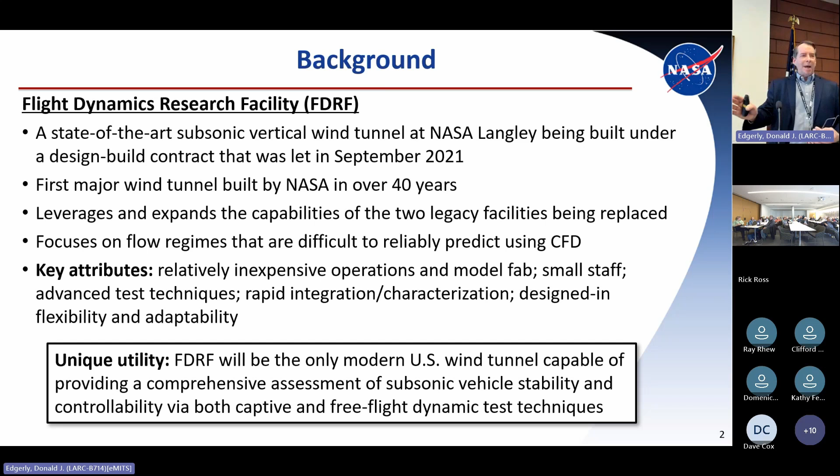So, all right, moving right along. So these are, and I'll try to use my little laser pointer here.

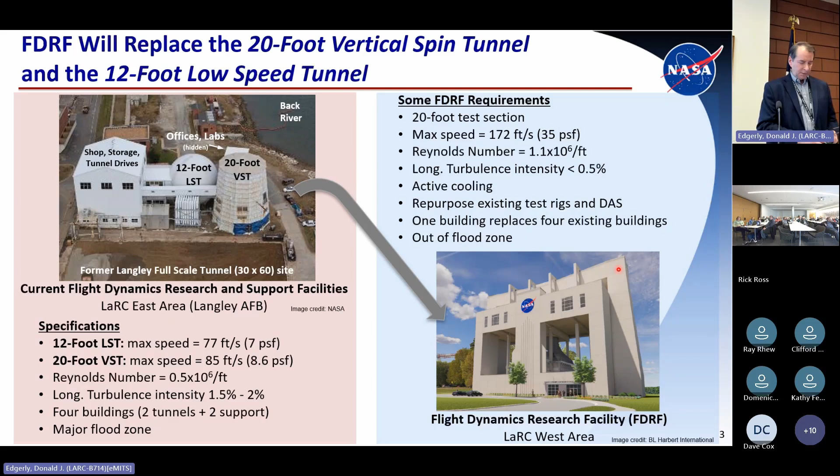This is before anybody ever talked about sea level rise, okay? So I'm assuming that was at high tide, but still, it's lapping at the concrete. I mean, they built it up a few feet, but after Isabel, I'll never forget having to go down to the bottom of the spin tunnel with a broom and sweep the crabs out. It smelled really bad down there. Some of them are still kicking, some of them weren't.

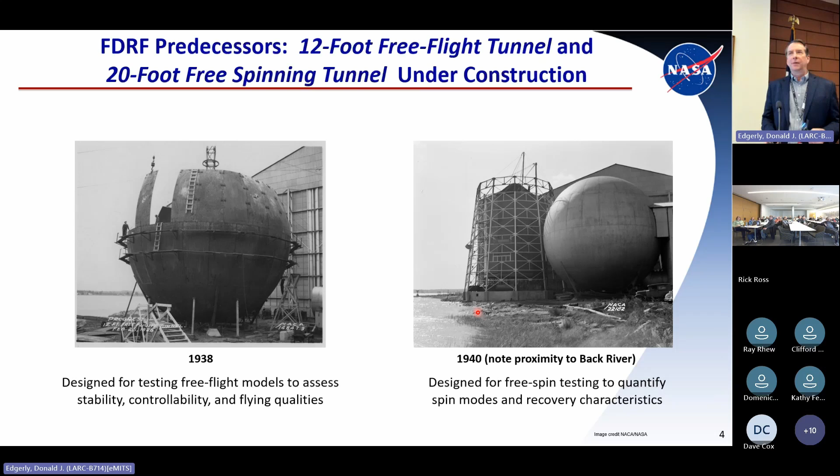But on the space side of the house, we've always, especially in the spin tunnel, supported the space program, all the way back prior to Project Mercury, doing things like landers, entry vehicles primarily, looking at dynamic stability. We did Mercury, Gemini, Apollo. We've now done Orion, and commercial crew, both Blue Origin and SpaceX.

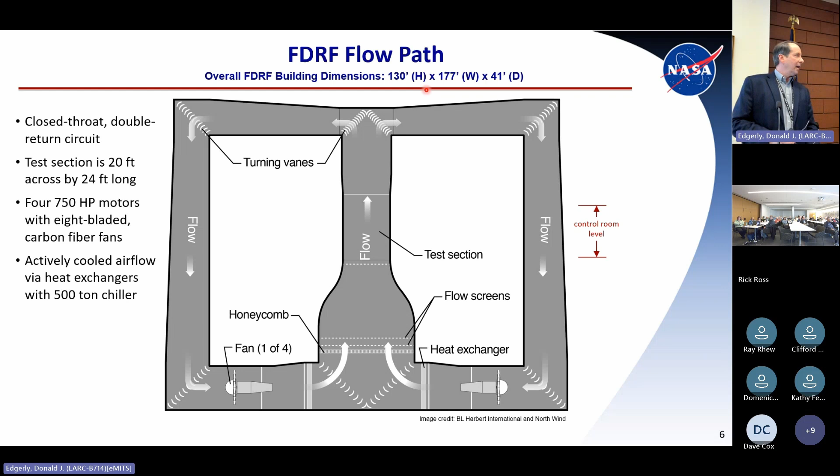And we'll have examples of people and models under test in the facilities. Our digital graphics guy, Lee Pollard, is working with me on that, and some others as well, to come up with the right photos.

It's going to curve around until it ends up at a big touch screen monitor showing what's going on today, going through all the decades until the tunnel comes online. Here's what's going on right now, and here's what's going to go on in the future, and that'll be changeable.

We also have a beautiful display case, floor to ceiling. It's about 18 feet long, floor to ceiling, and it's going to have a lot of the models and other test articles and artifacts going back to the 30s.

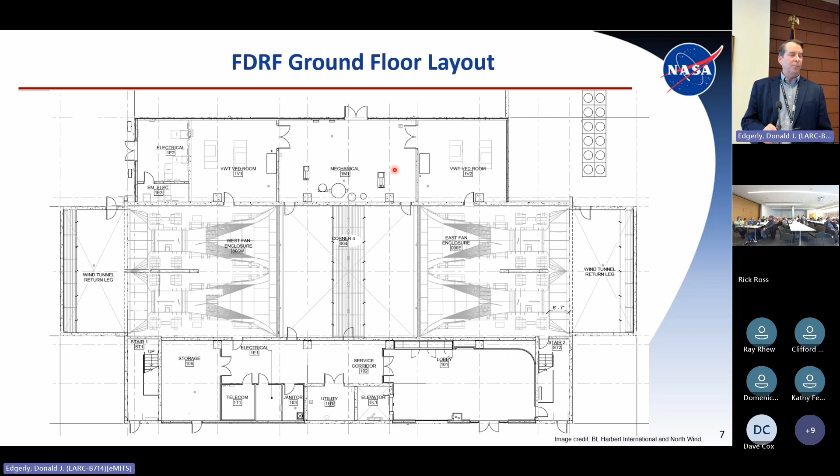Even though the tunnels themselves are very old and in need of a lot of maintenance, the test rigs, the data systems, and all that kind of instrumentation has been kept up to date. So we don't need to reinvent all that stuff, we're going to bring that over with us. That's phase 2 of this project, which we're getting pretty close to getting to.

That allows different types of dynamic motions to be made, and it also can handle much heavier test articles than the rotary balance. So between the two, we have a real spectrum of capability that we're bringing in.

The beauty also of the way we're doing this, unlike in the current facilities where the test rigs are either fixed in place or at best can push up against the side of the test section and kind of nest up against the wall, but they still hang out in the breeze — these are fully injectable and retractable.

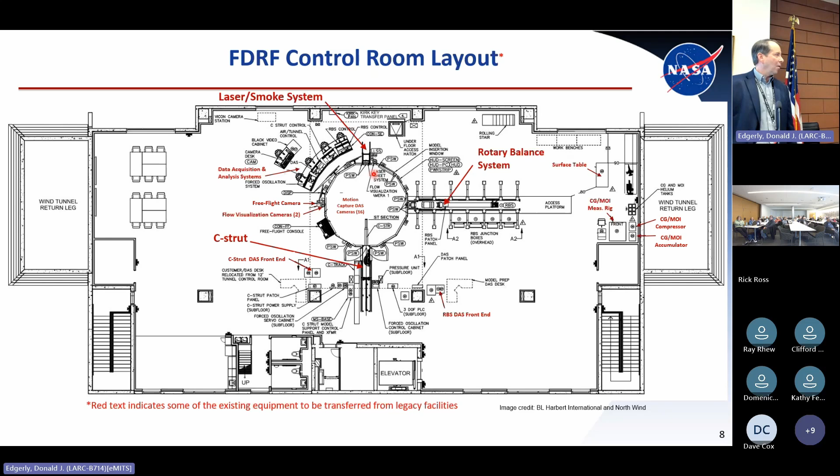It's actually pretty ingenious. So we need something like that in the new facility, but there've been all kinds of exotic proposals, like flying a UAS down there and grabbing it. But we'll probably end up with the grabber. Yeah, it's my guess too.

I'd just like to show this, and I haven't been good about using my laser pointer online, sorry folks. As I pointed out, this test section diameter is 20 feet, and by the way, it's 12-sided, it's not really a circle, but we still call it diameter. That's both the FDRF and the spin tunnel have that same diameter. This outer circle is the outer wall of the control room of the spin tunnel.

I just like to point out the difference in land area we're going to have for folks to work in. It's pretty dramatic. But like anytime you move into a bigger house, you think you have all the room in the world until you fill the whole thing up, and you need a bigger one. So I fully expect that to happen. That was actually kind of just a happy coincidence with the design too, because we didn't have a set requirement for how much space we needed.

We had a long list of stuff that had to come over from the existing tunnels, and we needed to be able to perform certain activities. But once they figured out the building structure necessary to support and access that, based on the original aero line drawing, it made sense. There are 5 central shafts: 2 return air towers, 2 stair towers, and a center shaft with the elevator and utility chase. It made economic sense structurally to span all the way across those, and that became essentially the entire second floor of the facility.

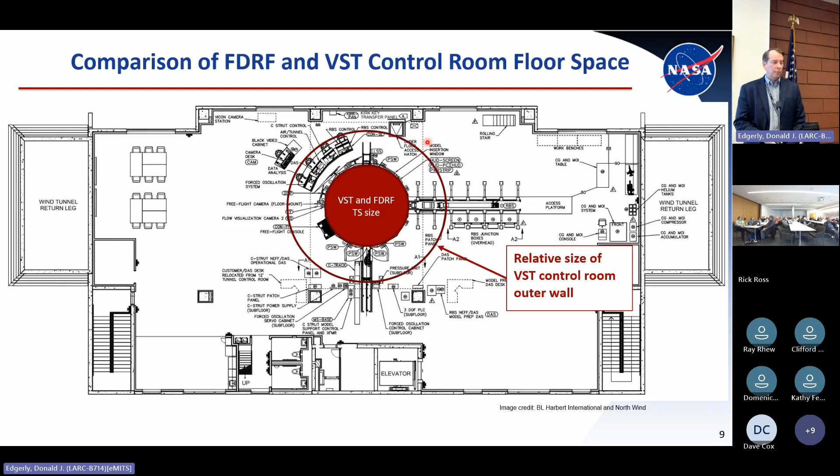Some of the test techniques, like free spin, require using the grabber to retrieve a model. This is an example: an F-18E model from 30 years ago being tested with a spin chute on the back. When the test is over, it falls to the bottom and has to be retrieved. For a test like that, I counted up something in excess of 800 separate launches of the model into the tunnel and retrievals, because you have to test such a large matrix of conditions. It's a nonlinear problem, so it's hard to extrapolate and say if it's good here, it's good there. A lot of that goes on in that type of testing.

This is what's called steady coning, that's the rotary balance. It's a captive test, just like in a typical wind tunnel, except now it can rotate about the velocity vector, simulating a spinning motion like an aircraft spin. You can measure forces and moments with an internal 6-component balance. You can take that data and do analysis to predict spin modes, or put it in a simulation database and use it as part of your 6 degree of freedom simulation, just like static data is used.

That rig also has what's called a forced oscillation motor on it. We can have the rig stationary and do the typical sinusoidal forced oscillation to get the dynamic derivatives, the damping coefficients. But in this case, because it's on the rotary balance, we can rotate it and oscillate it at the same time, which gives you some really dizzying type motion. It's a unique case where you need that kind of combined motion.

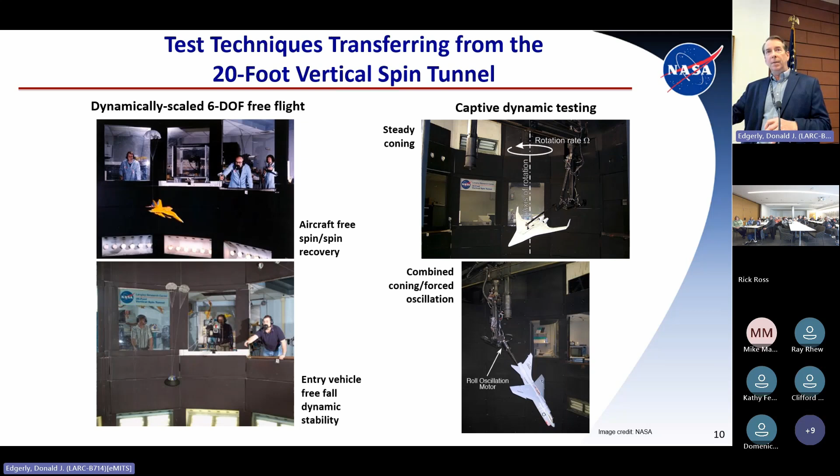Dave always likes to point out that F-22s make a lot more noise than we're going to make, but be that as it may, to that point, in the design we have a 500-ton air conditioning chiller sitting out there to cool the tunnel and keep it under temperature. It's a huge unit, and the designers put it behind a sound wall on the opposite side from Building 1208 to try to mitigate that noise concern. Okay, rolling on.

The previous chart was all spin tunnel kind of test techniques and rigs that are coming over. This is out of the 12-foot tunnel. I did point out that this is the C strut, which is the typical rig that has a 0 to 90 plus angle of attack or pitch range that we use. It also has a side slip capability.

We have smoke flow, laser light sheet smoke flow to visualize things like vortices. This is both on the X-59 when it was in the tunnel. We have the roll, pitch, and yaw capability for doing forced oscillation.

And then we have a relatively new, not new concept, but a new test rig in the 12-foot tunnel called 3 Degree of Freedom, where we're doing powered testing on a 3 Degree of Freedom rig, so all rotational degrees of freedom. And we have an active closed loop control system running. So at the same time, we're doing design of experiments type testing with system identification running. And these guys have been able to reduce the test time relative to doing a straight one factor at a time test campaign by a factor of an order of magnitude, basically.

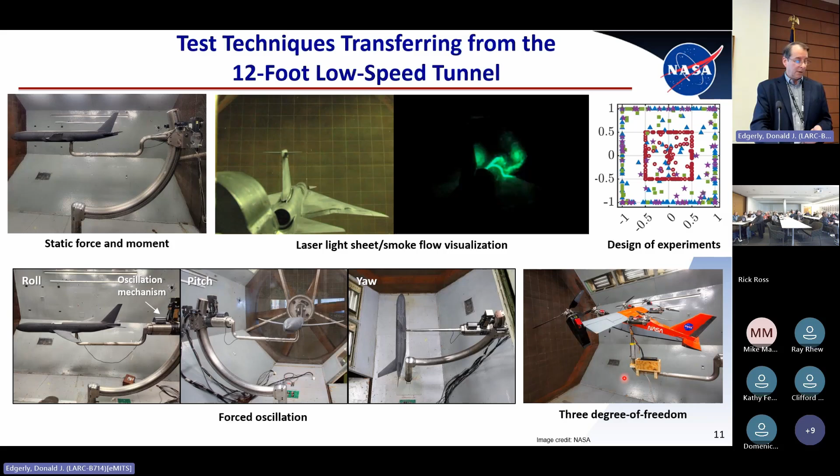So it's really, really encouraging, and it's applicable beyond just doing the power testing. But this is where they've used it so far. I think we had 4 AIAA papers at SciTech on it this year, and we had a paper on FDRF there as well.

Okay, I think the next one's my last chart, and then I'm gonna turn it over to Dave. So just again, because y'all are going to come into the building hopefully in a month or so, these are some artist concepts for what the interior will look like.

Some of them are a little bit dated, but on the upper left, you see the control room with the consoles I've already pointed out from the overhead view. Just kind of mentally put in your mind that all these pictures have these bright, shiny floors. Guarantee you they are not going to be bright and shiny very long when they start dragging stuff across the floor upstairs.

A lot of house plants. Yeah, a lot of house plants, a lot of ferns.

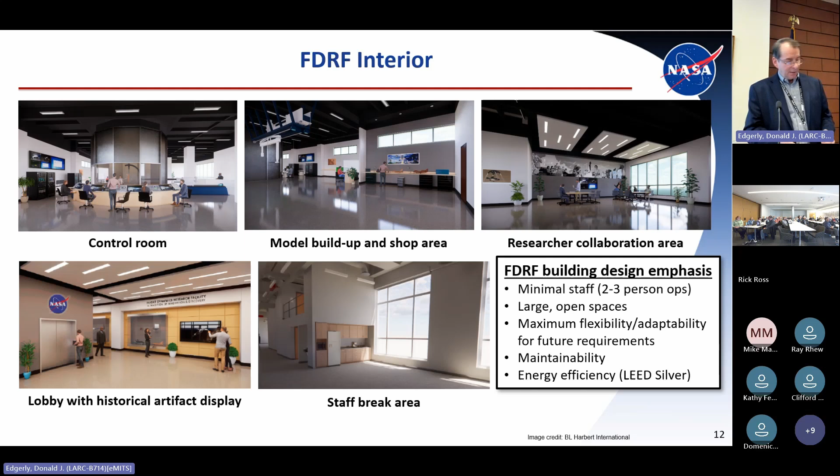Okay, so Dave, I think this is where you take it. The clicker's on the right.

As Mike mentioned, it's a design build contract, so a lot of the requirements for the performance of the facility really just center around the conditions we needed in the test section. We're executing this in partnership with GSA, which comes with its own challenges when you're working with another agency. But part of that is because we're able to leverage their larger contracting apparatus and the experience they have. They build a lot more buildings than we do. So this one's a unique building, but it's given us the opportunity to focus on the uniquely NASA aspects of the facility and not have to be as worried about things like fire alarm systems and routine building systems that GSA has more experience getting together.

And we went through a 2-phase solicitation process. They sent out, and this actually predates my time on the project and with NASA, a request for qualification, an RFQ, and got back 6 interested parties, I think. At the end of that process, this was like the 2019, 2020 timeframe, they down selected to 3 teams that we felt were the most competitive to deliver this facility.

We went through then another year and change of that kind of phase 2 process, which was the RFP. That culminated with those 3 offerors submitting a technical proposal, which included a concept design for the facility, which you might say is 30%. I think we'd probably argue maybe they were more like 10%, like type level of concept. But essentially enough of a design to show us what it would be and some rudimentary work that would demonstrate that the facility can meet the flow requirements that we have for the test section.

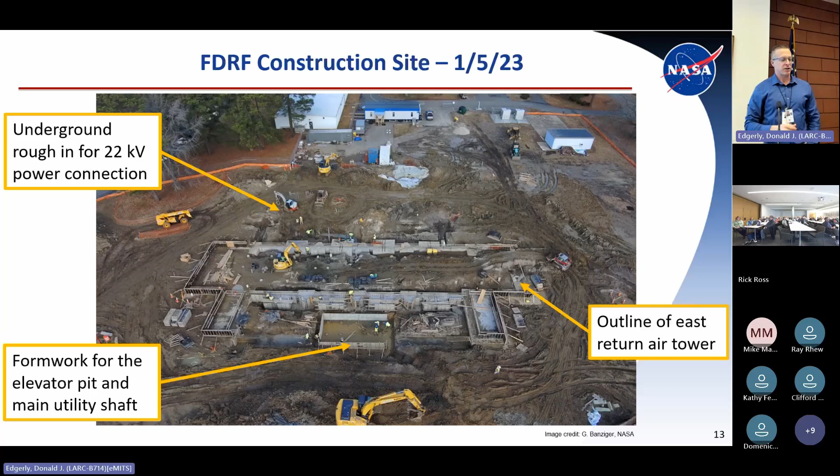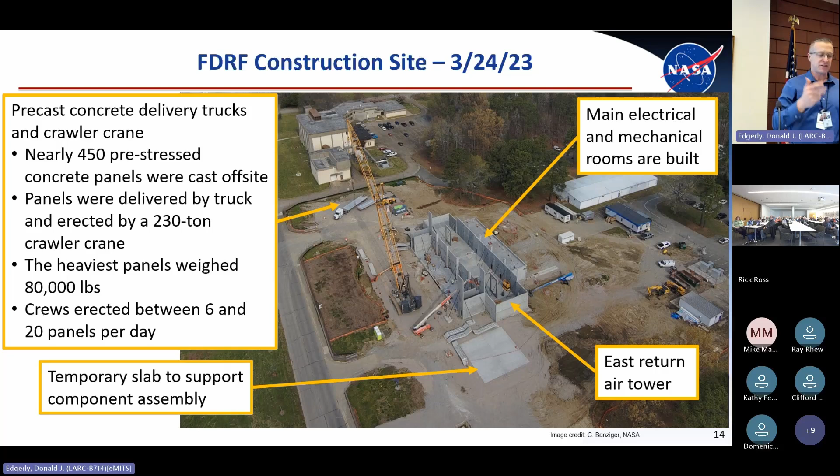This is as we're coming out of the ground, in January of 2023. In March, two months later, we're well on our way out of the ground with that precast construction. Those panels were cast up at Tindall Corporation in Petersburg, south of Richmond, then shipped down here on trucks and erected as they were delivered by a crawler crane on site. There's 450 panels overall that comprise the building.

Three months after that, we basically reached the limit of where they could go vertically before they had to start tying in the control room level. Before we did that, we needed them to set the fans in place. So in the bottom right corner, they've been working on assembling various components of the fans - the fan section, an inlet section, diffuser section - and then starting to drop those into place.

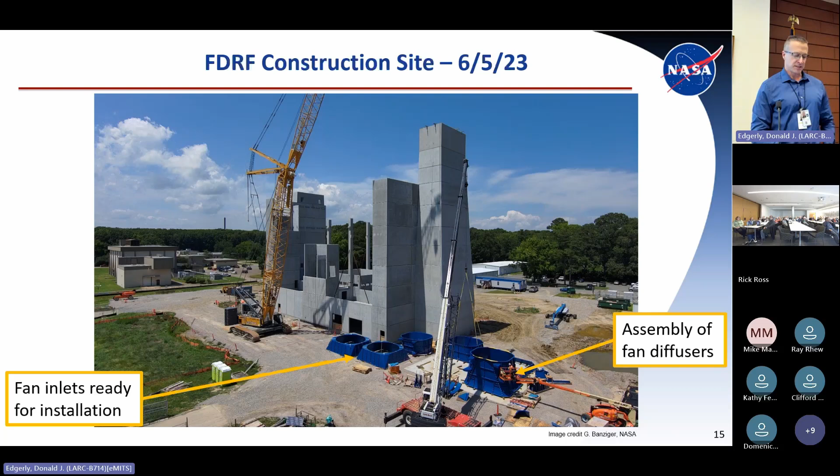Once the fans were set in, they continued to climb, and we paused one more time to set the contraction section in place. That was completely assembled on the ground, mostly assembled at the factory where they fabricated it before shipping it down here. Then it was assembled on the ground, lifted and picked in a single lift with the crane. It's about a 90,000 pound load that they set in place, fishing it down between the columns to set on top of the stilling chamber area.

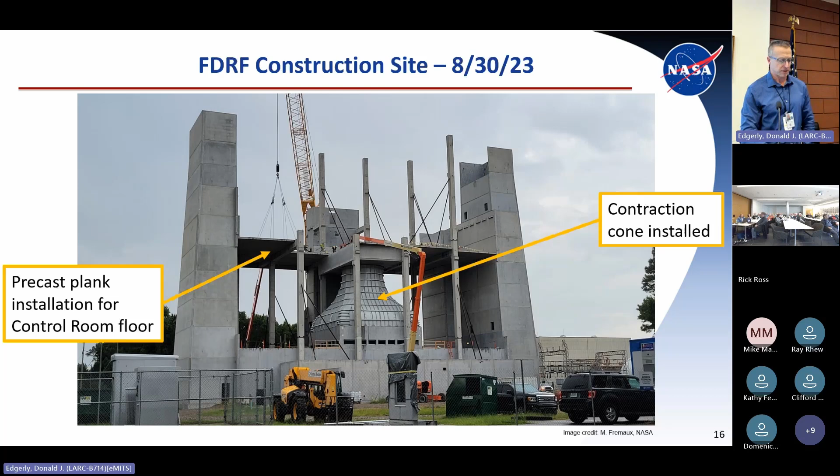Once that was in place, that set them loose to basically set in the control room floor, the control room roof, top out the air towers, and start hanging the skin. In this photo you can see on the left-hand side they're starting to hang the skin - you can see the bottom parts of some of the window openings there, and the rest of the facility.

We paused one more time - I don't have a good photo of it in this presentation - we've got that big square hole in the roof, right? So while this was shortly before or after this photo was taken, we started to assemble the test sections. That was all put together off on the right-hand side on that big concrete slab you see, and that was lifted in one big assembly, fished down through the opening in the roof there, and anchored off to where it currently sits.

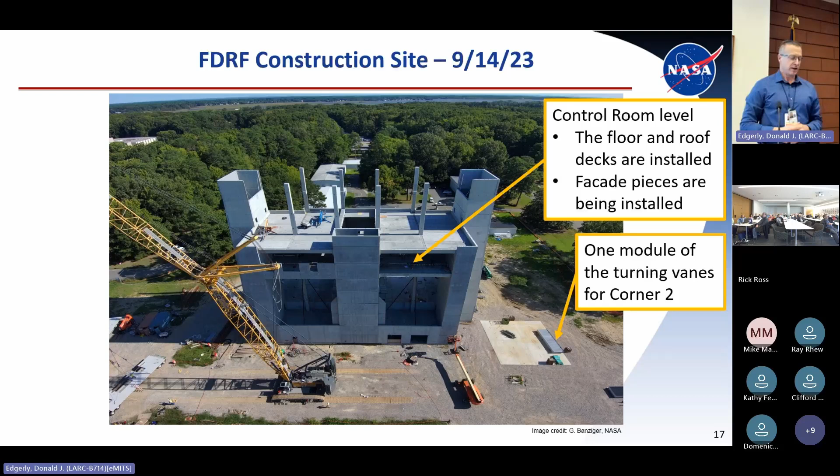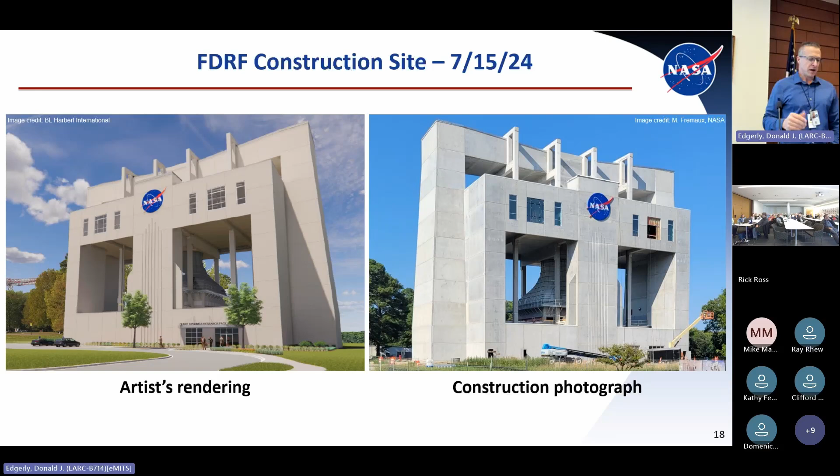And then that freed them up to basically finish the rest of the facility. So on the left, you've got the artist's rendering from earlier in the process that Mike had shown earlier in the presentation. On the right, we've got a photograph from a few months ago, showing we got pretty close to matching what the architect envisioned.

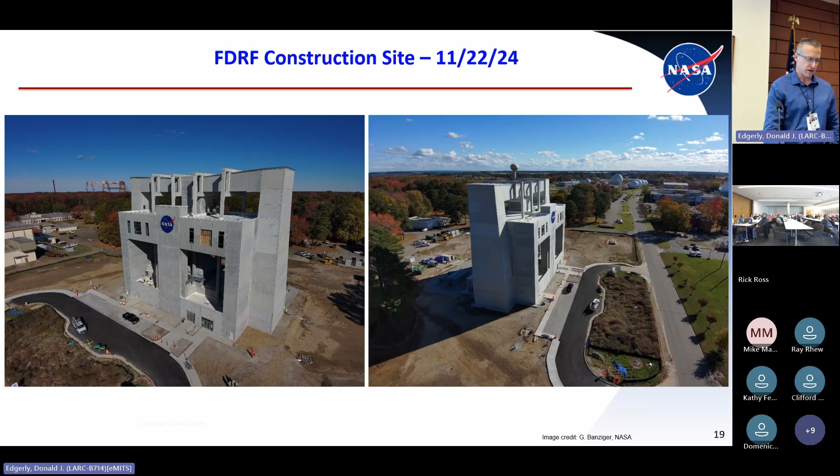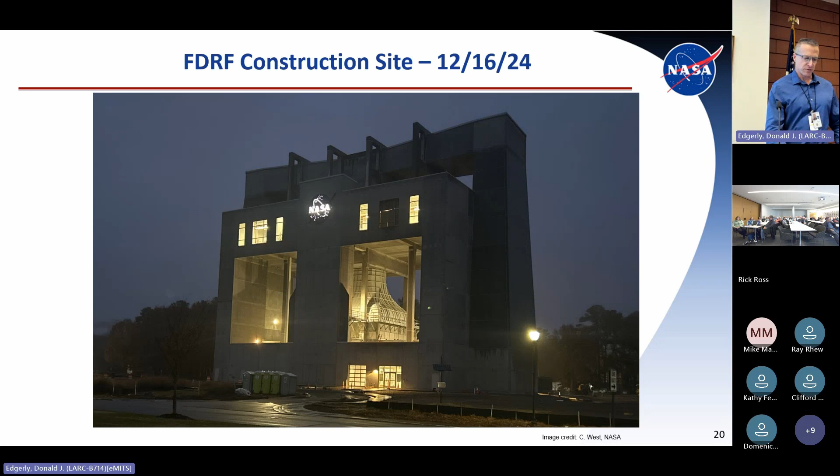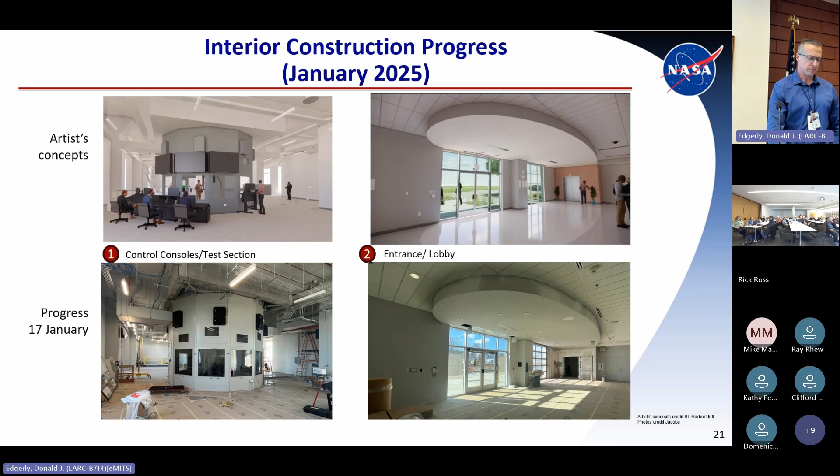So these are some photos of the inside. The top row is from the architectural drawings, their renderings, the concept, and then on the bottom row we try to match generally that same kind of perspective with photos - in this case, back in January, of the test section. The floors are done - not quite as shiny as the renderings. In both these photos, we've got them covered up with some protective cardboard to stop the crews still out there working from tearing them up.

This is a picture of - we got 4 fans. This is a picture of the pair of fans on the east side of the tower, or the east side of the facility, so you get a sense of scale there. Not as big as 14 by 22, or what full scale had, but still quite large.

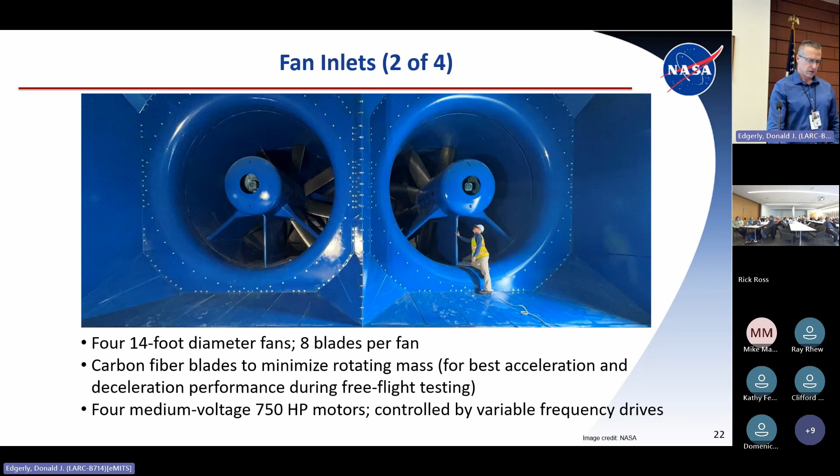And these are some of the rendering concepts for how the two test rigs from the existing tunnels will come over. As Mike mentioned, the top left photo, vertical spin tunnel, the rotary balance kind of stows up against the side of the test section, generally gets out of the way, but never fully leaves the airflow.

At FDRF, we've got a truss structure anchored to the control room roof and a carriage and rail system that translates the rig in and out of the test section completely. The C-strut in the top right there is shown in the 12 foot test section. Bottom right, that is also going to be mounted to essentially a linear actuator rail system anchored to the floor in the control room, fully injectable and retractable from the test section.

Obviously we also have to kind of adapt that rig. It's currently in a 12-foot tunnel, has a horizontally oriented test section. It'll be adapted to work vertically at FDRF.

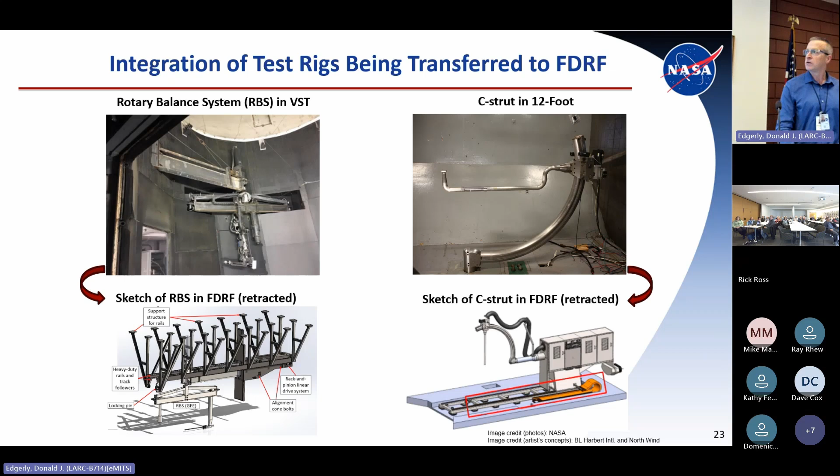And then project timeline. So the number one question I get is when's it going to be done? And the number two question I get lately is when's ribbon cutting?

As Mike mentioned, we're pretty close to getting to phase 2 of the project. We intentionally structured two phases of the contract to minimize the downtime to the ongoing research efforts over at those two tunnels. The last thing we wanted is to award this project and then day one they take them offline and we're down for three years. So we're requiring them to essentially demonstrate that they've met the flow criteria requirements in the empty test section of the tunnel before we let them take those two facilities offline.

An hour from now, I'll be upstairs essentially defending the project's readiness to start the integrated testing of the tunnel. So the drive system is complete. The cooling system is operational. We're not quite done checking out the control system in its synthetic environment. The flow path is built, but we're hoping to basically go wind-on in the tunnel for the first time about the end of this week.

And then we've got about 5 weeks or so of shaking down the facility, kind of making sure that it can hold and hit its various set points, that fans aren't vibrating excessively, and all the other kind of checks that go into making sure the machine is running properly.

At about the end of this month, the plan is to go over to vertical spin and 12-foot, have the technicians over there essentially demonstrate that all this stuff works when you came and took it from us, contractor, and then they'll set to removing it.

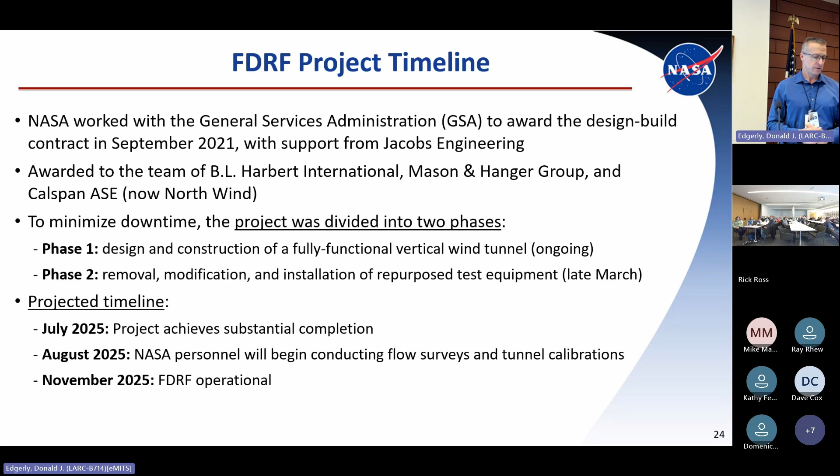I'll probably ask Mike to join me up here if there's any more questions. I know we've run over a little bit as well.

I don't know the wind speed off the top of my head, but one of the benefits of using GSA and just a classical construction approach is the building code requires certain wind speeds given our zone, where we live relative to the Atlantic Ocean and hurricanes. So I forget the exact wind speed, but that was factored into the requirements for what it needs to be able to endure.

Thank you very much. Thank you. And we're going to get a picture of you too. We're going to get a picture of you too. Thank you. Great. Yay!